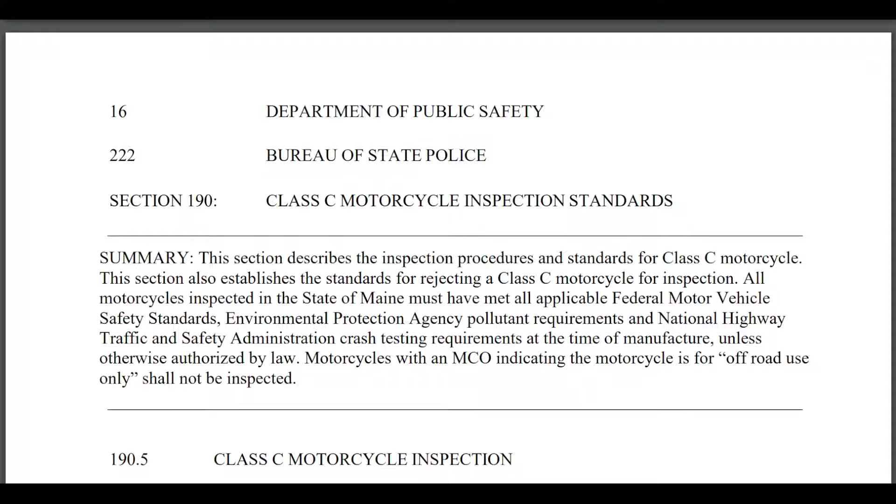Class C Motorcycle Inspection. 1. Brakes. A. General. 1. Wheels and drums are not required to be removed from the vehicle being inspected to determine the condition of the brake drums and linings, unless the inspection technician believes, based upon training and experience, that there is a problem or failure with the brakes and advises the customer that the vehicle cannot be passed for inspection without the removal of wheels and or drums to allow further assessment, so as to determine whether the vehicle may be passed for inspection.

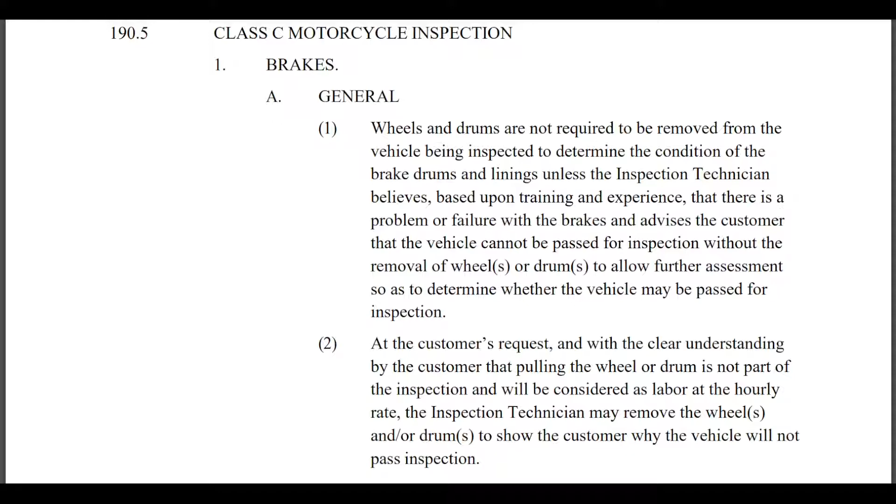2. At the customer's request, and with clear understanding by the customer that pulling the wheel or drum is not part of the inspection and will be considered as labor at the hourly rate, the inspection technician may remove the wheels and or drums to show the customer why the vehicle will not pass inspection.

3. Whenever an inspection technician feels that a road test of the motorcycle is necessary to ascertain braking efficiency or safe handling characteristics, a road test may be completed before an inspection sticker is issued.

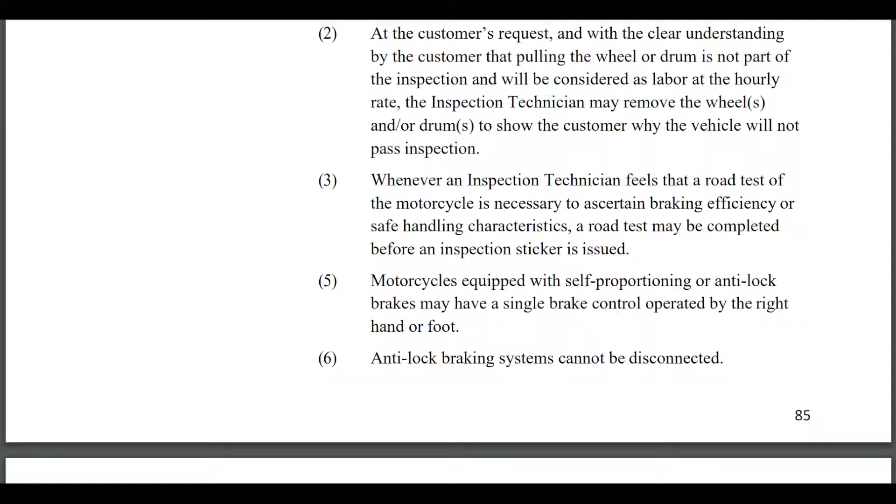5. Motorcycles equipped with a self-proportioning or anti-lock brakes may have a single brake control operated by the right hand or foot. 6. Anti-lock braking systems cannot be disconnected.

B. Brake system test procedures. 1. Brake hydraulic system test. The inspection technician must be able to maintain brake pedal or hand lever reserve under moderate pressure, 40 to 60 pounds, for 1 minute. A. Reject a vehicle if the brake reserve cannot be maintained for 1 minute.

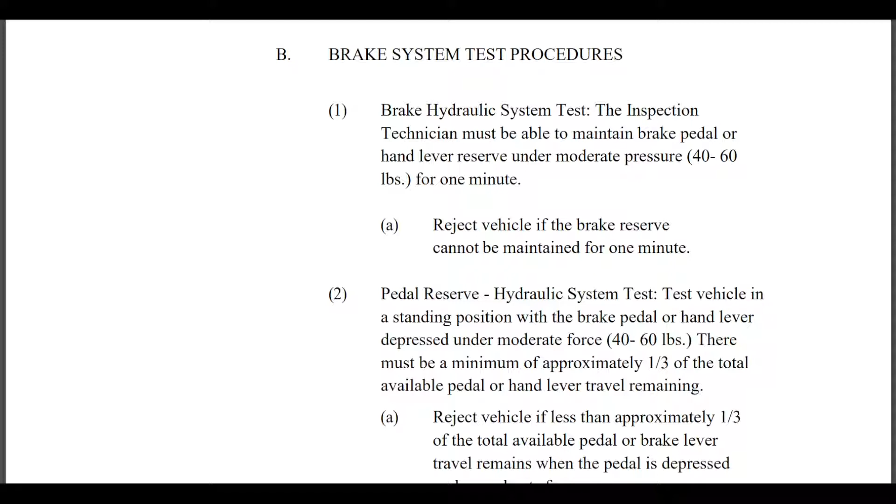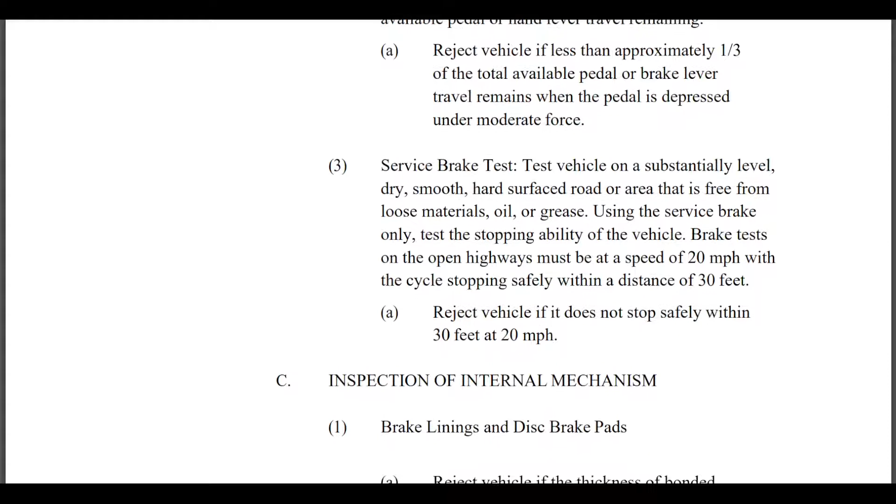2. Pedal reserve hydraulic system test. Test vehicle in a standing position with the brake pedal or hand lever depressed under moderate force, 40 to 60 pounds. There must be a minimum of approximately 1/3 of the total available pedal or hand lever travel remaining. A. Reject vehicle if less than approximately 1/3 of the total available pedal or brake lever travel remains when the pedal is depressed under moderate force.

3. Service brake test. Test vehicle on a substantially level, dry, smooth, hard surfaced road or area that is free from loose materials, oil, or grease. Using the service brake only, test the stopping ability of the vehicle. Brake tests on the open highways must be at a speed of 20 miles per hour, with the cycle stopping safely within a distance of 30 feet. A. Reject vehicle if it does not stop safely within 30 feet at 20 miles per hour.

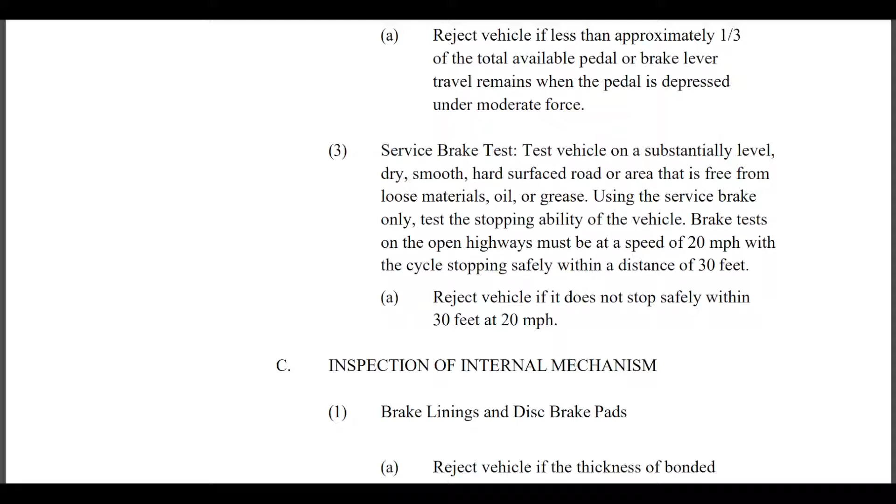C. Inspection of internal mechanism. 1. Brake linings and disc brake pads. A. Reject vehicle if the thickness of bonded brake linings, when measured at the thinnest point, is less than 2/32 of an inch. B. Reject vehicle if any wire in a wire-backed lining is visible in the friction surface. C. Reject vehicle if any riveted lining is worn to within 2/32 inch of the rivet head. D. Reject vehicle if any rivet is loose or missing, or if the lining is not securely fastened.

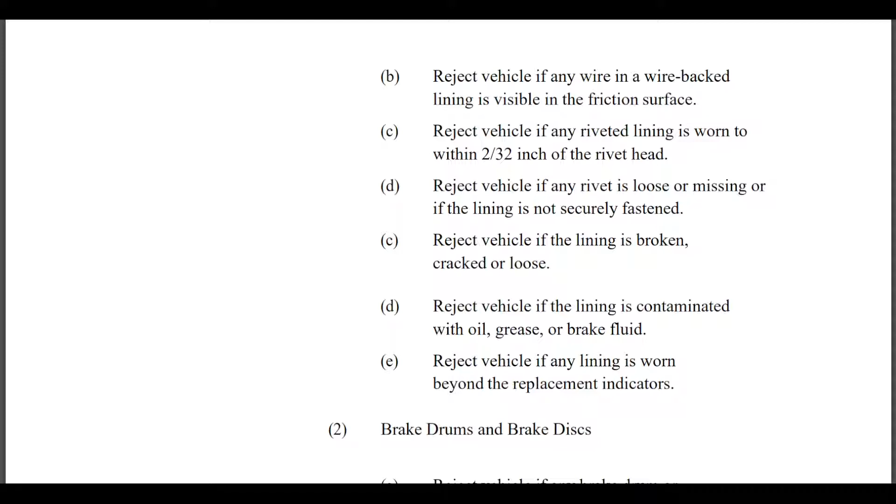C. Reject vehicle if the lining is broken, cracked, or loose. D. Reject vehicle if the lining is contaminated with oil, grease, or brake fluid. E. Reject vehicle if any lining is worn beyond the replacement indicators.

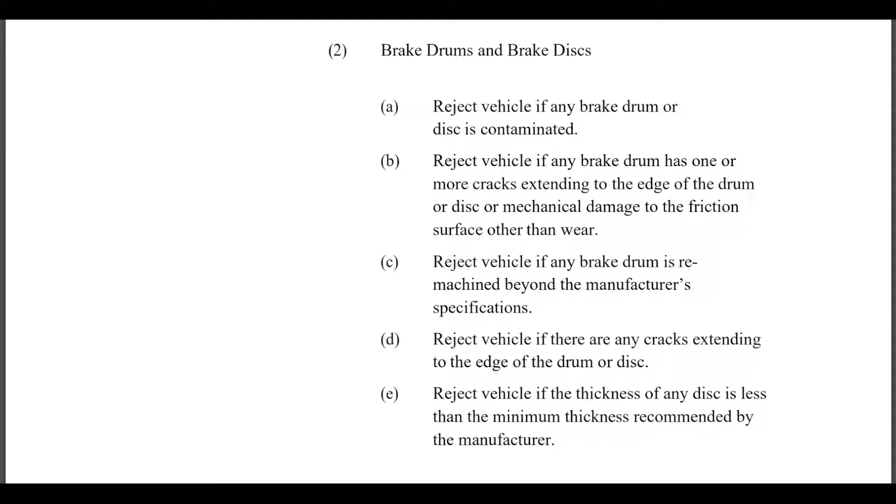2. Brake drums and brake discs. A. Reject vehicle if any brake drum or disc is contaminated. B. Reject vehicle if any brake drum has one or more cracks extending to the edge of the drum or disc, or mechanical damage to the friction surface other than wear. C. Reject vehicle if any brake drum is remachined beyond the manufacturer's specifications. D. Reject vehicle if there are any cracks extending to the edge of the drum or disc. E. Reject vehicle if the thickness of any disc is less than the minimum thickness recommended by the manufacturer.

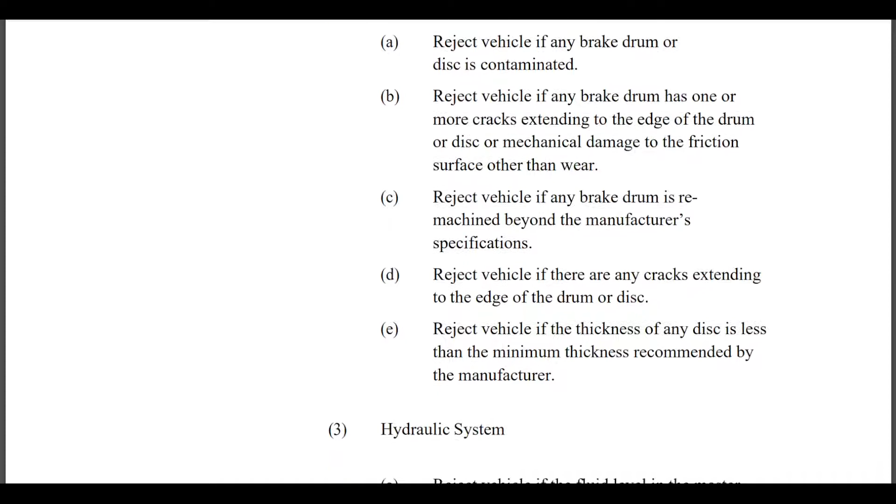3. Hydraulic system. A. Reject vehicle if the fluid level in the master cylinder reservoir is below 3/4 full.

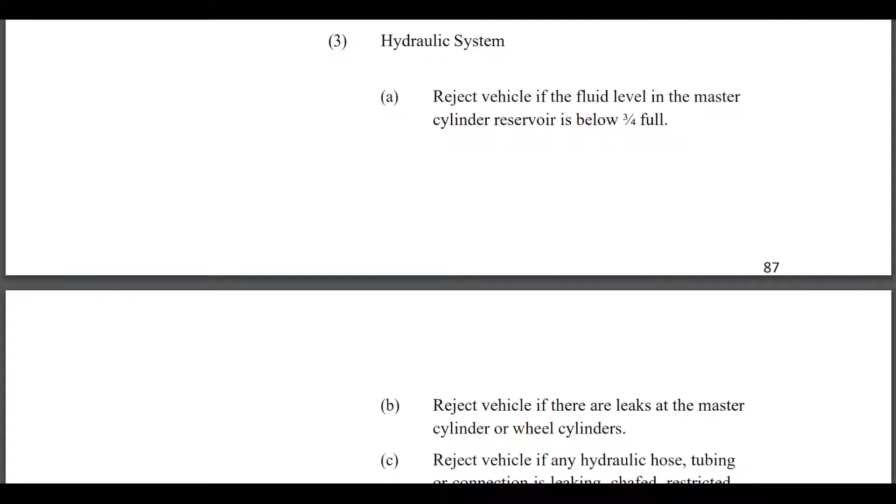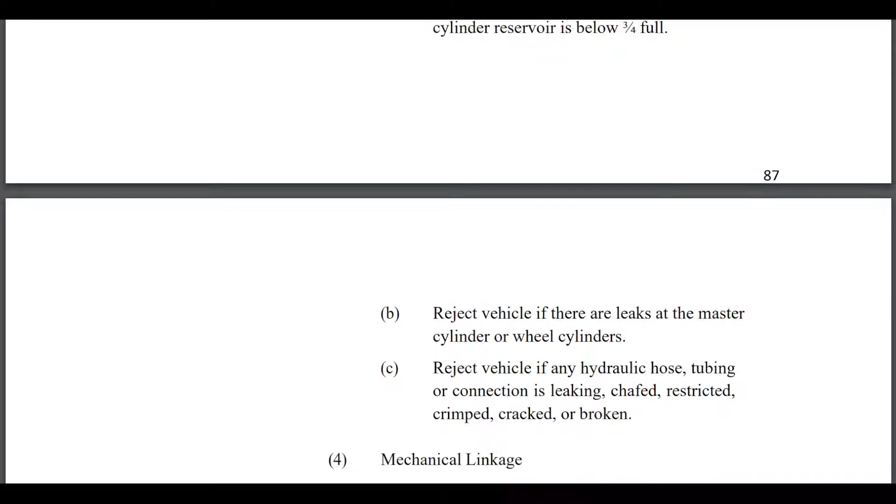Reject vehicle if there are leaks at the master cylinder or wheel cylinders. Reject vehicle if any hydraulic hose, tubing, or connection is leaking, chafed, restricted, crimped, cracked, or broken.

Mechanical linkage. Reject vehicle if any mechanical part is missing, broken, or badly worn. Reject vehicle if there is high friction in the pedal, lever, or linkage in the brake components. Reject vehicle if any brake operating lever or pedal is improperly positioned or misaligned. Reject vehicle if any brake cable has more than one strand broken, cut, or missing. Reject vehicle if any portion of the handbrake lever is broken or missing.

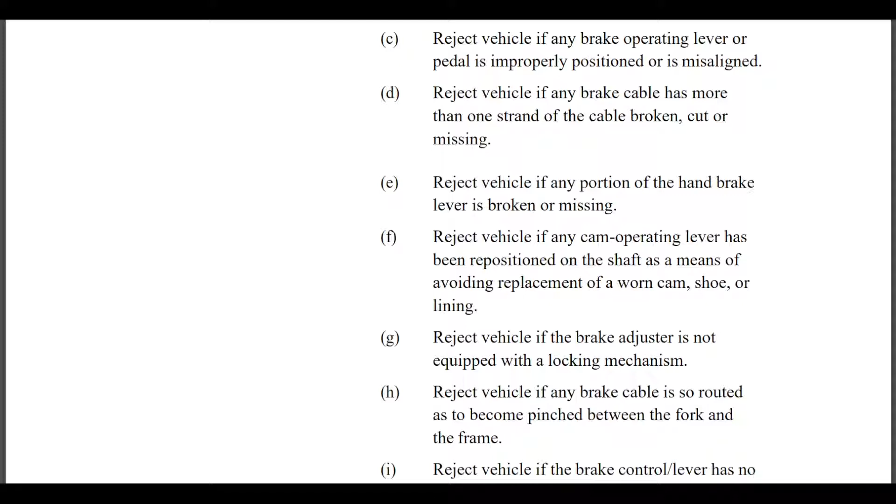Reject vehicle if any cam operating lever has been repositioned on the shaft as a means to avoid replacement of a worn cam, shoe, or lining. Reject vehicle if the brake adjuster is not equipped with a locking mechanism. Reject vehicle if any brake cable is so routed as to become pinched between the fork and the frame.

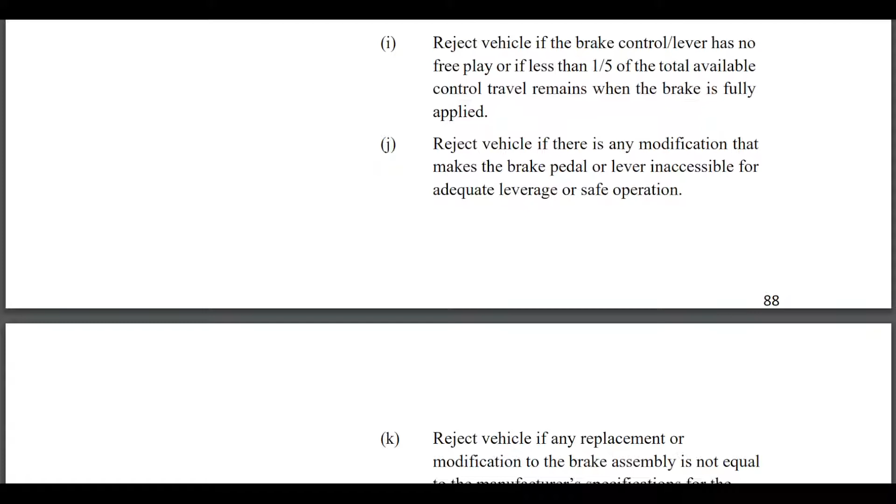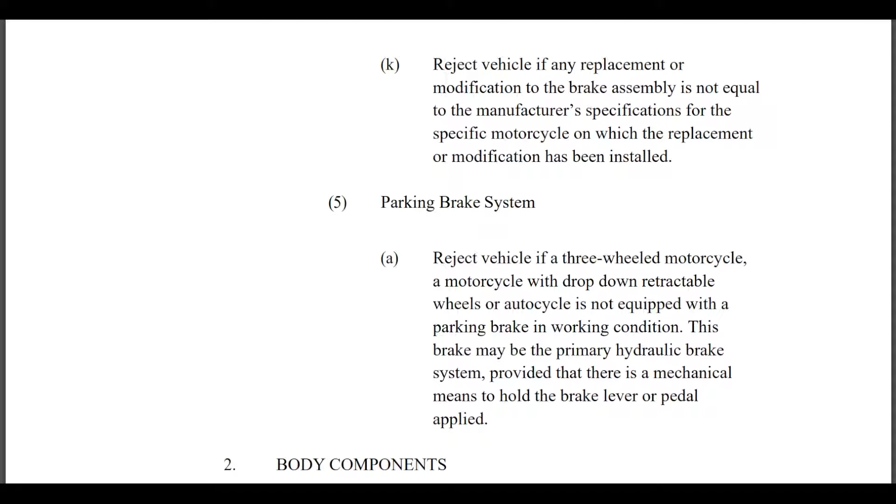Reject vehicle if the brake control lever has no free play, or if less than 1/5 of the total available control travel remains when the brake is fully applied. Reject vehicle if there is any modification that makes the brake pedal or lever inaccessible for adequate leverage or safe operation. Reject vehicle if any replacement or modification to the brake assembly is not equal to the manufacturer's specifications for the specific motorcycle on which the replacement or modification has been installed.

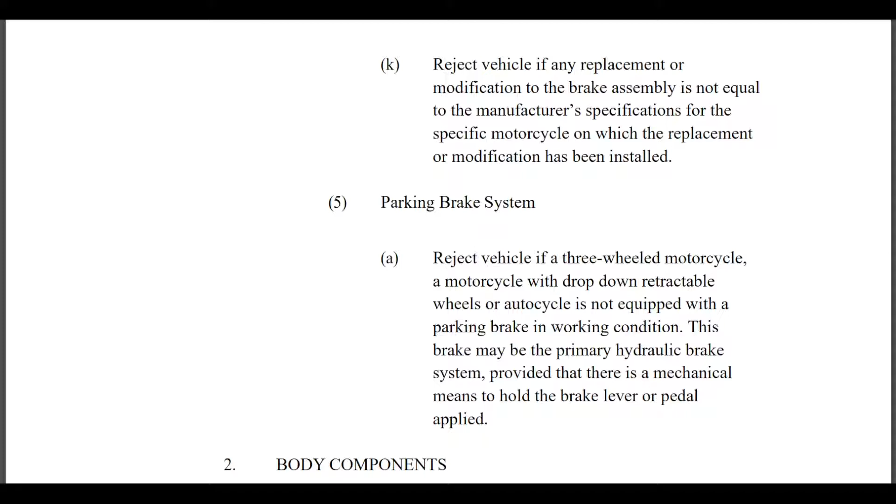Parking brake system. Reject vehicle if a 3-wheeled motorcycle, a motorcycle with drop-down retractable wheels, or an autocycle is not equipped with a parking brake in working condition. This brake may be the primary hydraulic brake system, provided that there is a mechanical means to hold the brake lever or pedal applied.

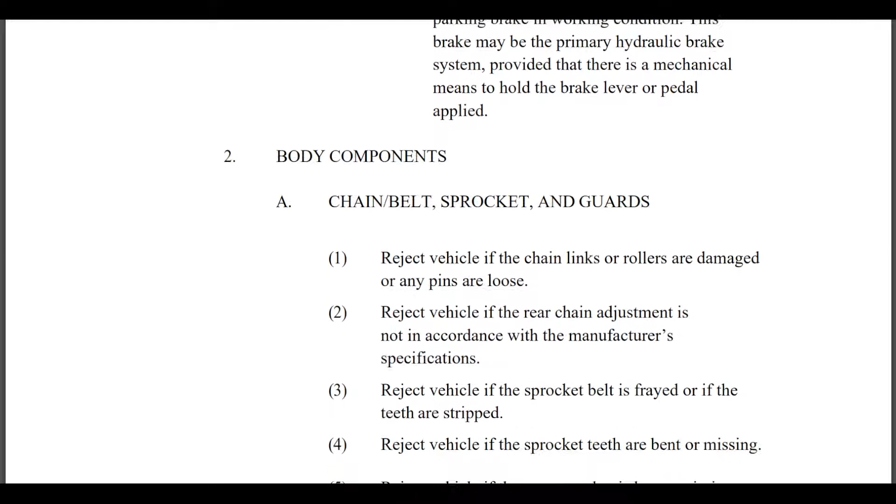Body components. Chain/belt, sprocket, and guards. Reject vehicle if the chain links or rollers are damaged or any pins are loose. Reject vehicle if the rear chain adjustment is not in accordance with the manufacturer's specifications. Reject vehicle if the sprocket belt is frayed or if the teeth are stripped. Reject vehicle if the sprocket teeth are bent or missing. Reject vehicle if the rear sprocket is loose, missing bolts, or is cracked.

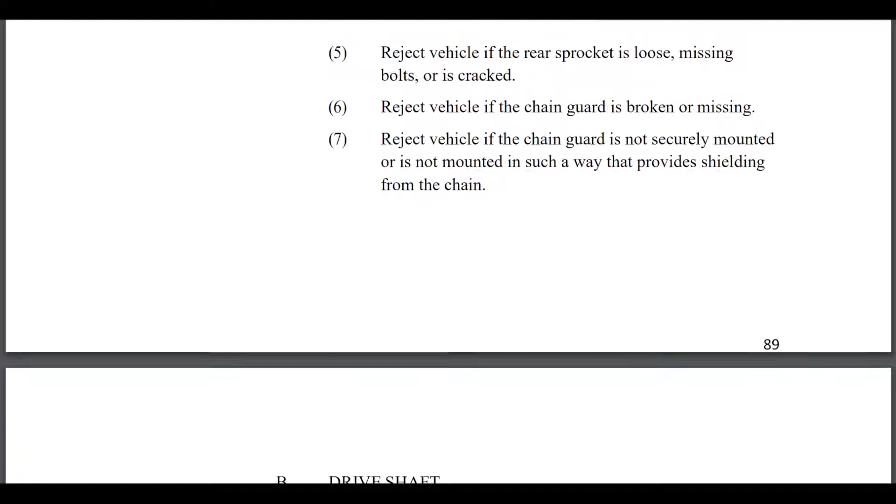Reject vehicle if the chain guard is broken or missing. Reject vehicle if the chain guard is not securely mounted or is not mounted in such a way that provides shielding from the chain. Drive shaft. Reject vehicle if the drive shaft is leaking fluid.

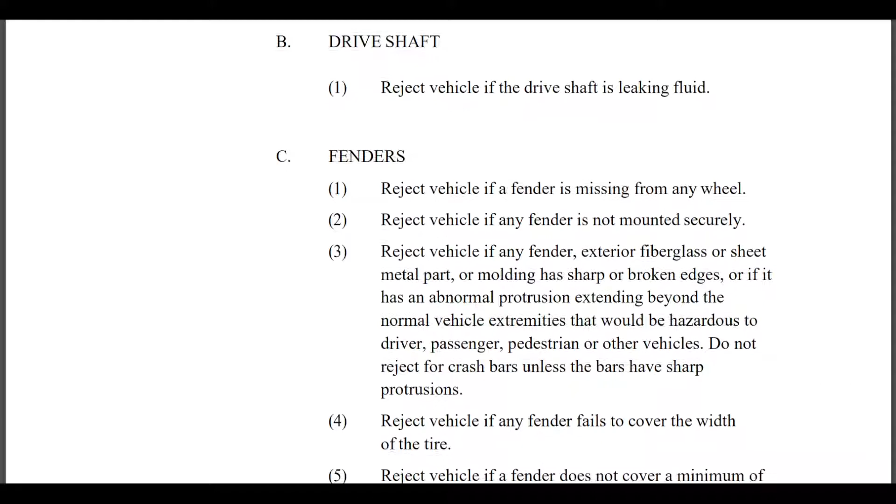Fenders. Reject vehicle if a fender is missing from any wheel. Reject vehicle if any fender is not mounted securely. Reject vehicle if any fender, exterior fiberglass or sheet metal part, or molding has sharp or broken edges, or if it has an abnormal protrusion extending beyond the normal vehicle extremities that would be hazardous to driver, passenger, pedestrians, or other vehicles. Do not reject for crash bars unless the bars have sharp protrusions.

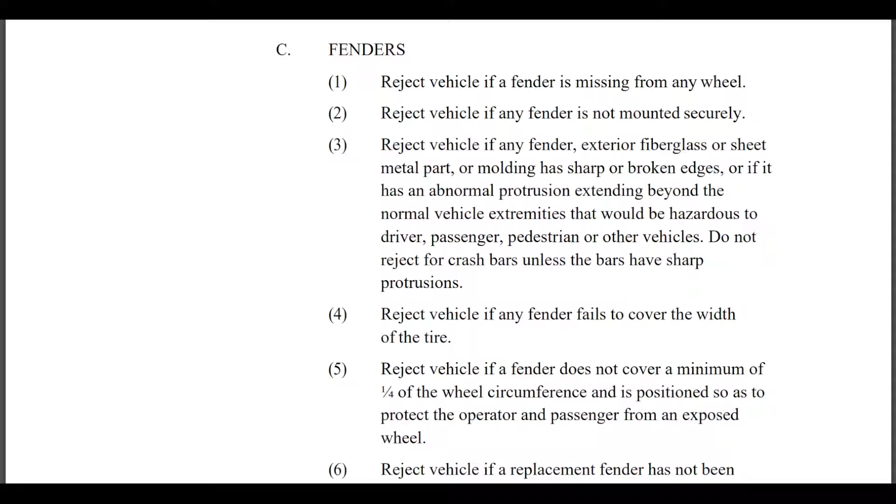Reject vehicle if any fender fails to cover the width of the tire. Reject vehicle if a fender does not cover a minimum of 1/4 of the wheel circumference and is positioned so as to protect the operator and passenger from an exposed wheel. Reject vehicle if a replacement fender has not been refitted with a required lighting device.

Stands. Reject vehicle if the center or side stands do not operate properly. Reject vehicle if the motorcycle does not remain on the stand when the front wheel is turned from stop to stop. Reject vehicle if either stand is cracked or broken. Reject vehicle if the stand will not retract or remain in a fully retracted or stored position.

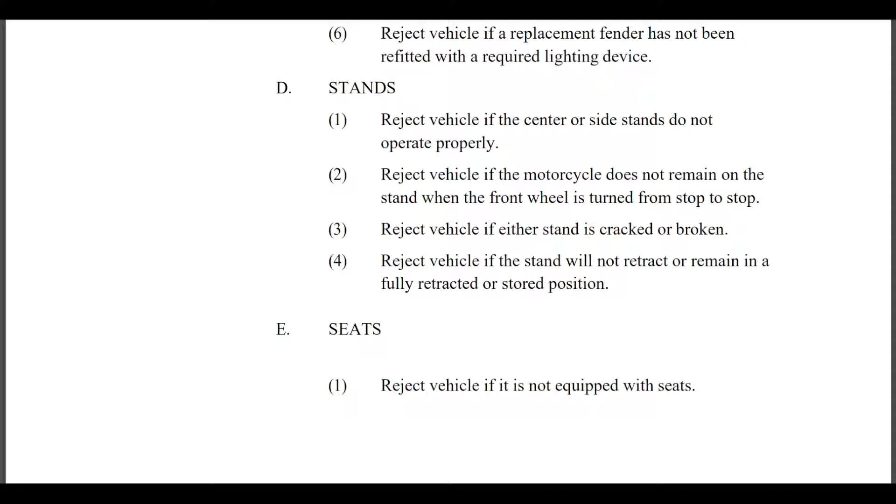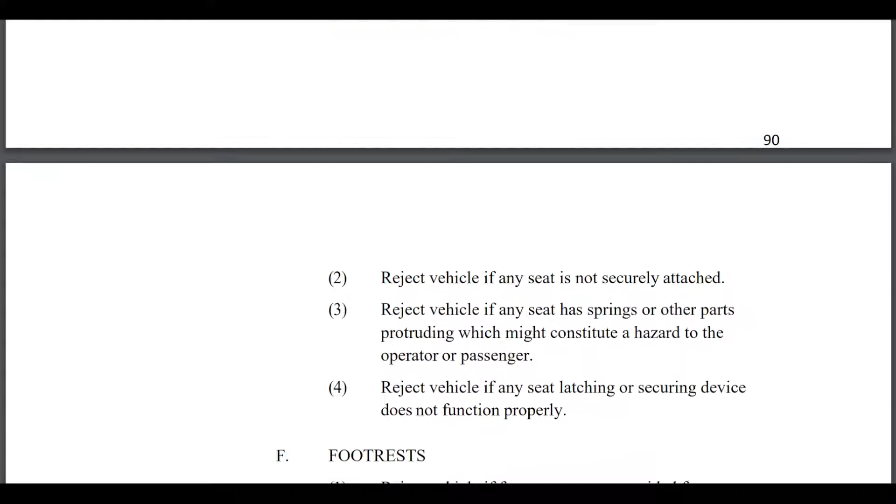Seats. Reject vehicle if it is not equipped with seats. Reject vehicle if any seat is not securely attached. Reject vehicle if any seat has springs or other parts protruding which might constitute a hazard to the operator or passenger. Reject vehicle if any seat latching or securing device does not function properly.

Footrests. Reject vehicle if footrests are not provided for each designated seating position. Reject vehicle if the footrests are not in an accessible position for a passenger's feet. Reject vehicle if any footrest is not securely attached. Reject vehicle if any footrest does not fold upward or rearward when not in use.

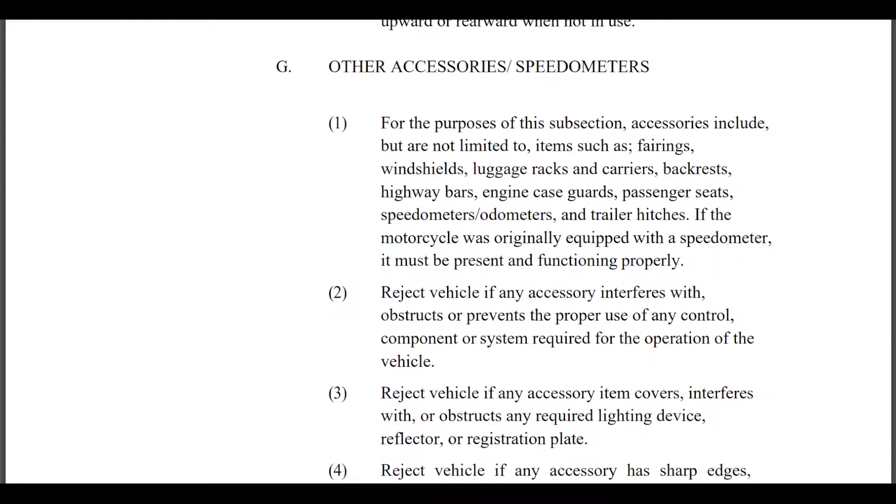Accessories and speedometers. For the purposes of this subsection, accessories include, but are not limited to, items such as fairings, windshields, luggage racks and carriers, backrests, highway bars, engine case guards, passenger seats, speedometers or odometers, and trailer hitches. If the motorcycle was originally equipped with a speedometer, it must be present and functioning properly.

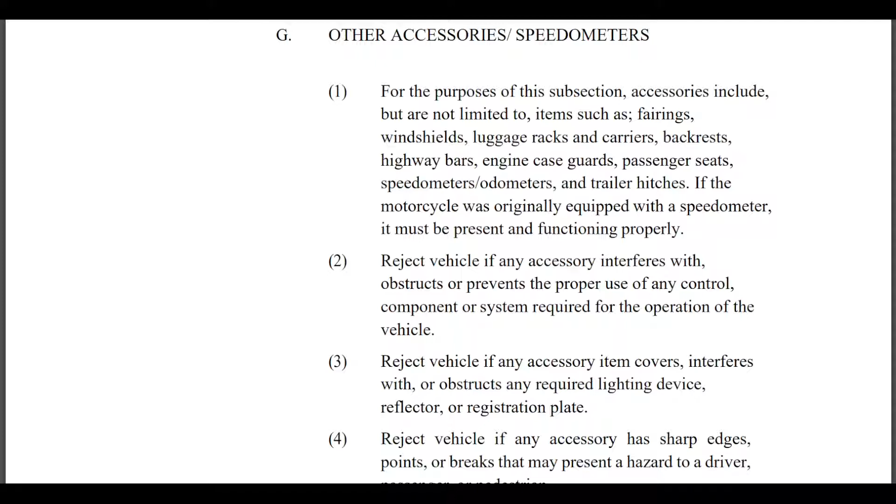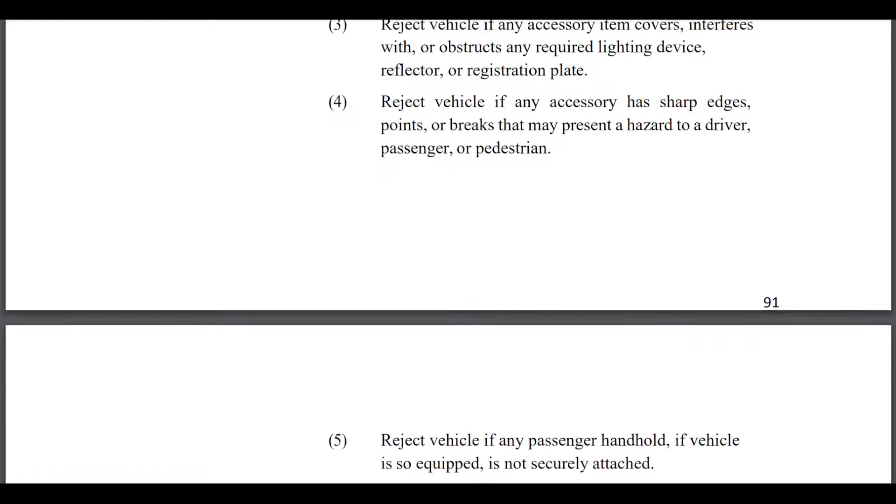Reject vehicle if any accessory interferes with, obstructs, or prevents the proper use of any control, component, or system required for the operation of the vehicle. Reject vehicle if any accessory item covers, interferes with, or obstructs any required lighting device, reflector, or registration plate. Reject vehicle if any accessory has sharp edges, points, or breaks that might present a hazard to a driver, passenger, or pedestrian.

Reject vehicle if any passenger handhold, if vehicle so equipped, is not securely attached. Reject vehicle if an installed windscreen is cracked, discolored, or scratched so as to obstruct the driver's forward vision. Reject vehicle if the glazing in an installed windscreen is not of an approved type. Reject vehicle if an installed windscreen obstructs or obscures the driver's view of the road surface directly ahead of the front wheel. Reject vehicle if any attaching bracket, clamp, bolt, brace, or other similar fastening device anywhere on the motorcycle is loose, broken, or in other than a safe condition.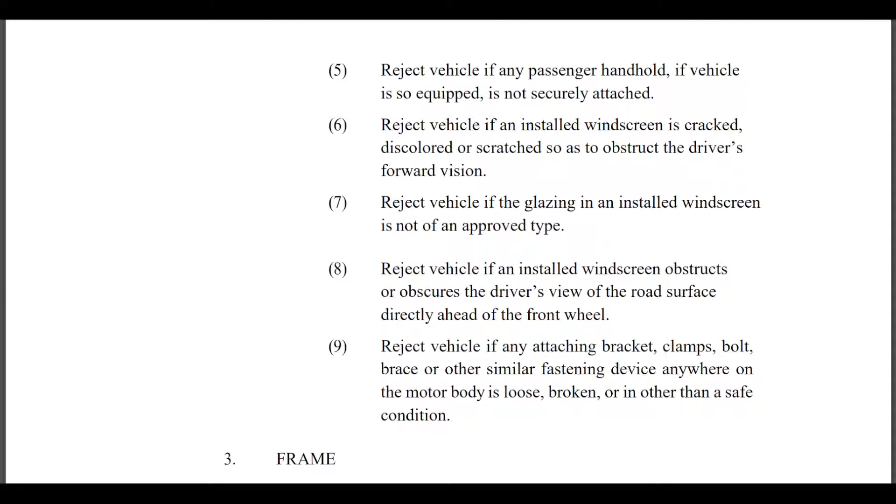Frame. Reject vehicle if any part of the frame has been removed so as to weaken the original structure. Reject vehicle if the frame is cracked, broken, or twisted, or if there's evidence of structural damage. Reject vehicle if any weld or joint shows cracks or fatigue breaks. Reject vehicle if the frame is out of alignment.

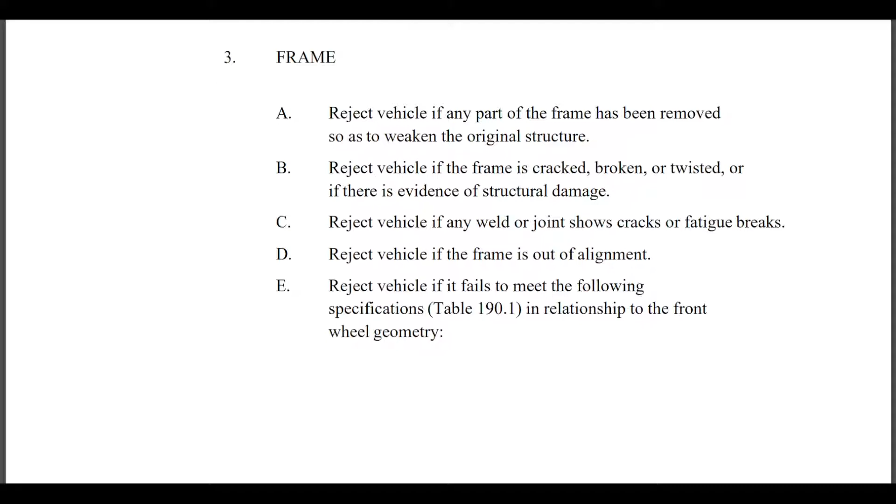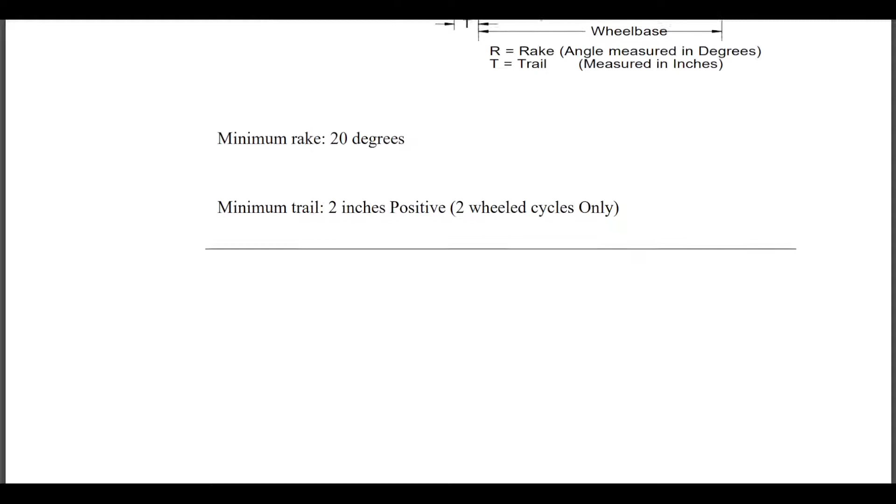Steering and suspension. Front fork. Reject vehicle if any fork component is loose or shows any perceptible wear. Reject vehicle if fork slugs have been installed. Reject vehicle if the length of the original fork has been extended by replacing the original tubes with tubes longer than 16 inches, or if the vehicle exceeds the rake and trail limits. Reject vehicle if Springer-type front forks exceed the original design by 18 inches or more.

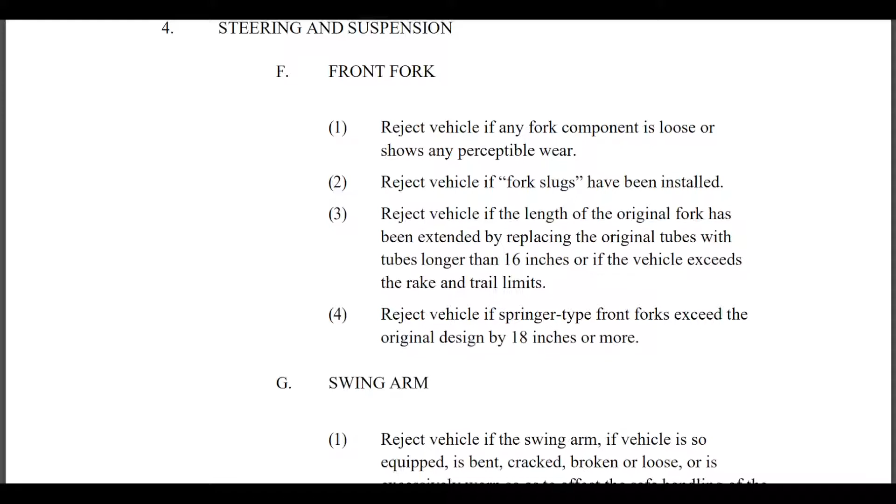Swing arm. Reject vehicle if the swing arm, if the vehicle is so equipped, is bent, cracked, broken, or loose, or is excessively worn so as to affect the safe handling of the vehicle.

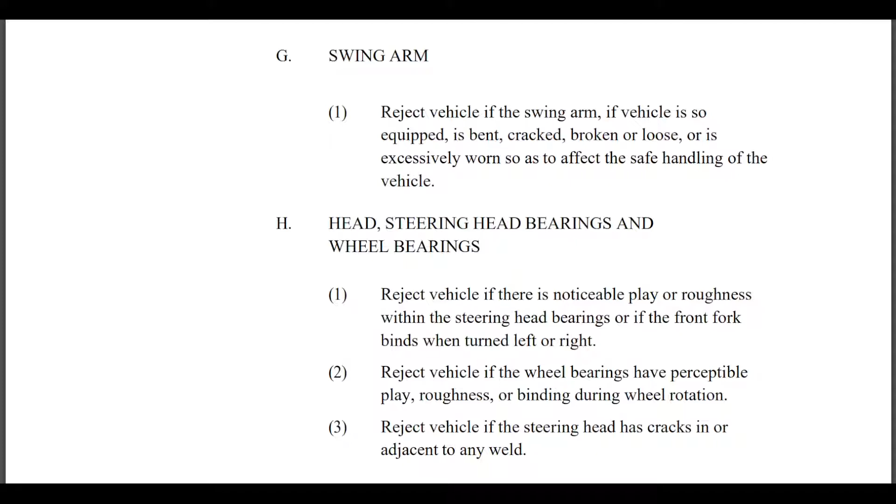Head, steering head bearings, and wheel bearings. Reject vehicle if there is noticeable play or roughness within the steering head bearings, or if the front fork binds when turned left or right. Reject vehicle if the wheel bearings have perceptible play, roughness, or binding during wheel rotation. Reject vehicle if the steering head has cracks in it or adjacent to any weld.

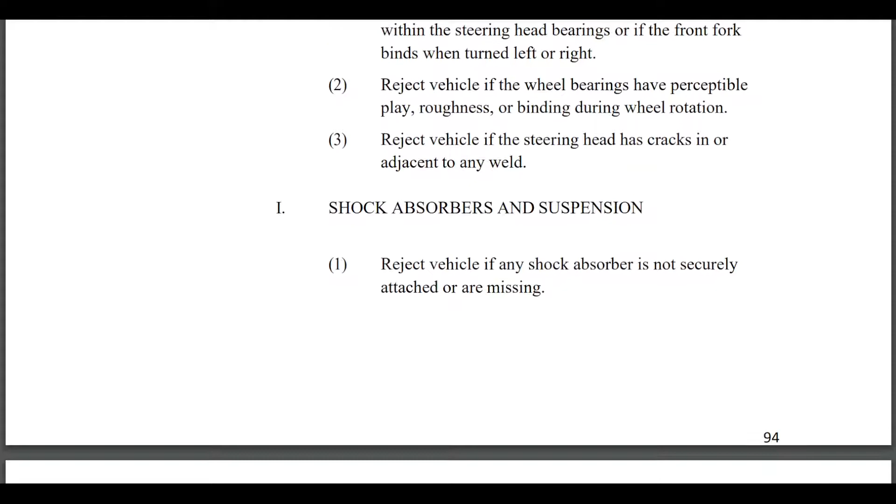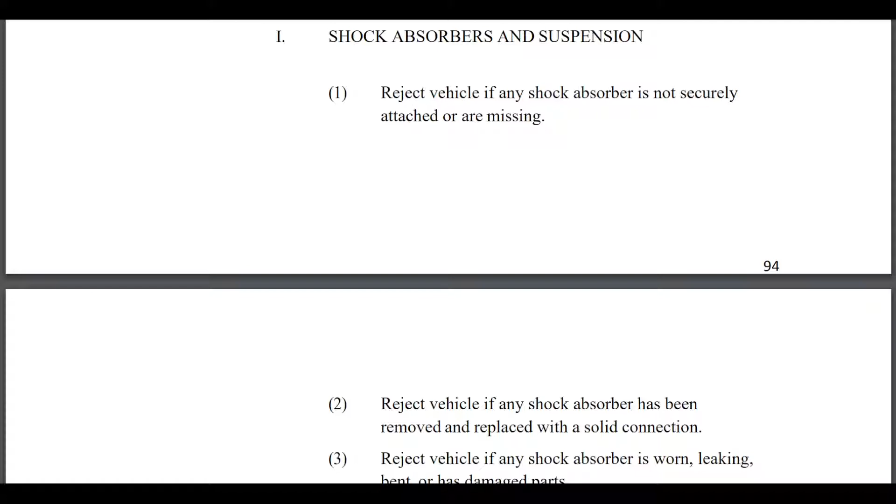Shock absorbers and suspension. Reject vehicle if any shock absorber is not securely attached or is missing. Reject vehicle if any shock absorber has been removed and replaced with a solid connection. Reject vehicle if any shock absorber is worn, leaking, bent, or has damaged parts. Reject vehicle if any suspension spring is broken, worn, or loose.

Reject vehicle if a hard tail frame is not of a type manufactured completely as a hard tail. A bolt-on or weld-on type is not acceptable. This criterion does not apply to three-wheeled vehicles.

Handlebars. Reject vehicle if the handlebars are cracked, broken, or misaligned. Reject vehicle if the handlebars are positioned so that the hand grips are at a level above the operator's shoulder height when the operator is sitting astride the seat, or if the hand grips are positioned such that the vertical rise is more than 15 inches above the surface of the operator's seat. If the handlebars were originally manufactured at a height greater than 15 inches from the seat, you may pass the vehicle as long as the conditions above are met and the height is not greater than the original handlebars. A motorcycle must meet the lesser of these two values.

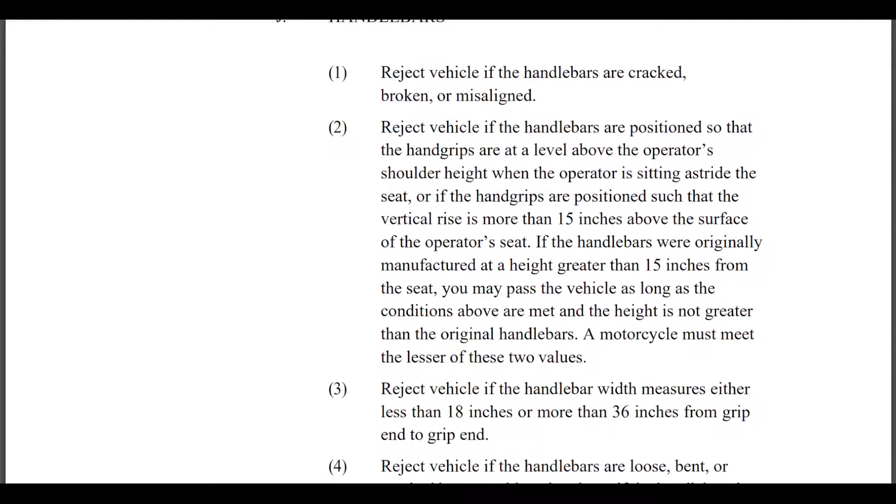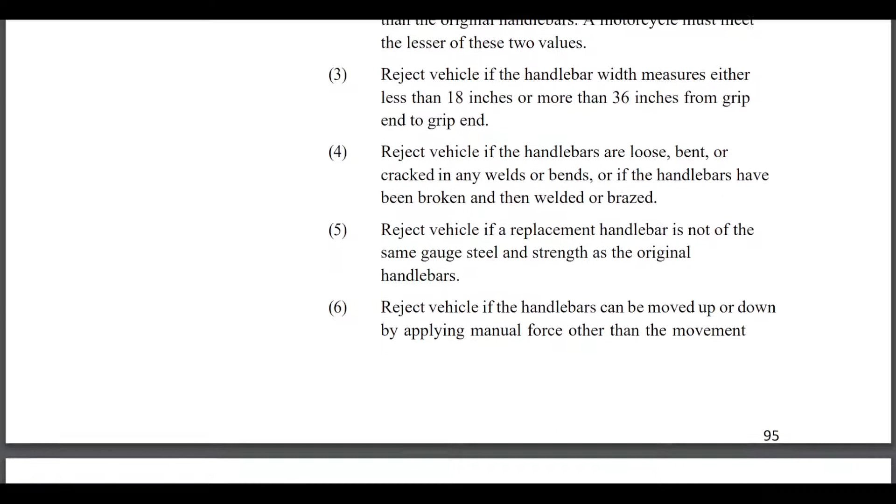Reject vehicle if the handlebar width measures less than 18 inches or more than 36 inches from grip end to grip end. Reject vehicle if the handlebars are loose, bent, or cracked in any welds or bends, or if the handlebars have been broken and then welded or brazed. Reject vehicle if a replacement handlebar is not of the same gauge steel and strength as the original handlebars.

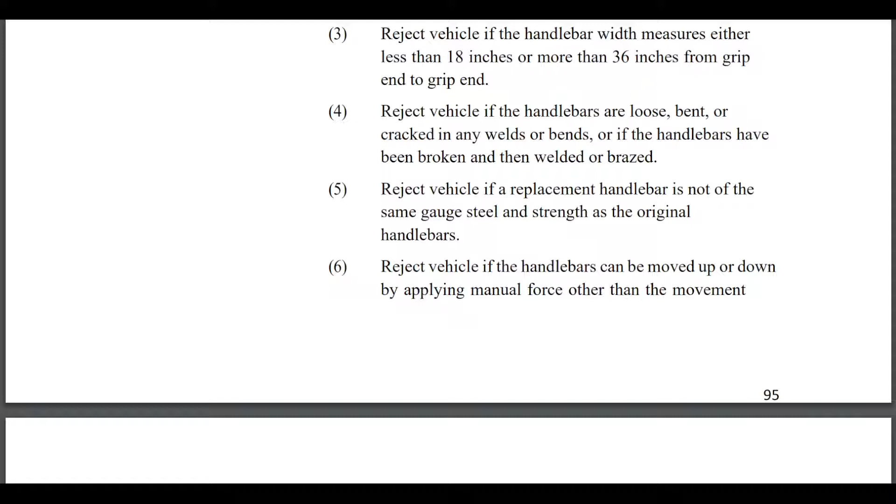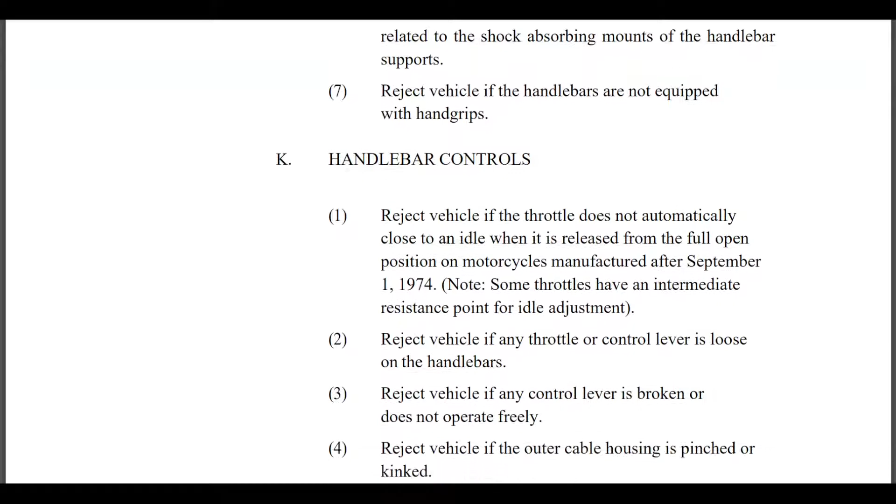Reject vehicle if the handlebars can be moved up and down by applying manual force, other than the movement related to the shock-absorbing mounts of the handlebar supports. Reject vehicle if the handlebars are not equipped with hand grips.

Handlebar controls. Reject vehicle if the throttle does not automatically close to an idle when it is released from the full open position on motorcycles manufactured after September 1st, 1974. Note: some throttles have an intermediate resistance point for idle adjustment.

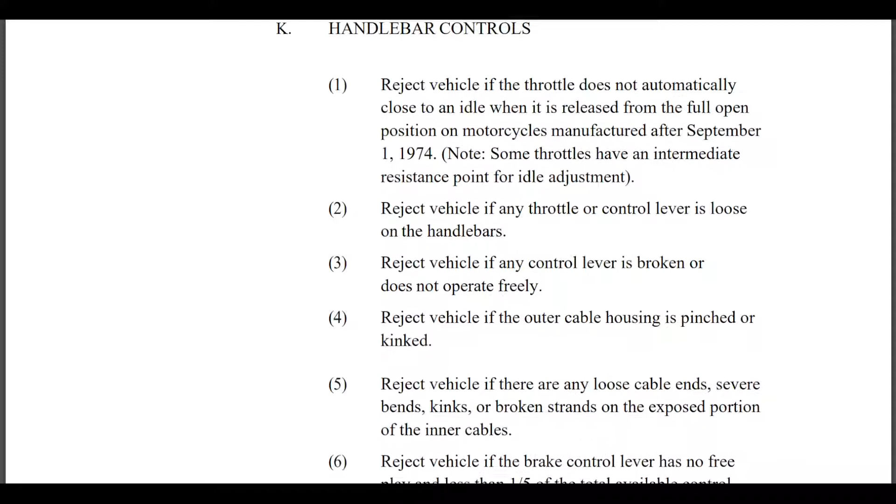Reject vehicle if any throttle or control lever is loose on the handlebars. Reject vehicle if any control lever is broken or does not operate freely. Reject vehicle if the outer cable housing is pinched or kinked. Reject vehicle if there are any loose cable ends, severe bends, kinks, or broken strands on the exposed portion of the inner cables.

Reject vehicle if it is not equipped with an operable engine stop control. Reject vehicle if any cable is excessively slack.

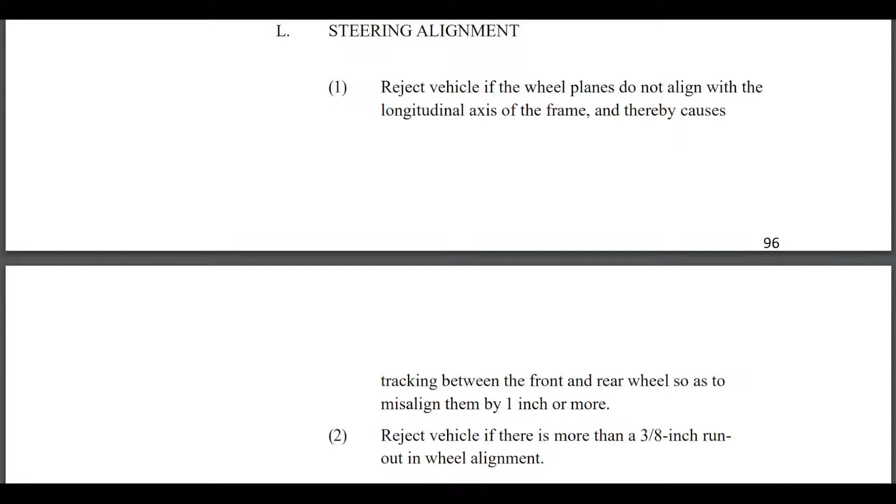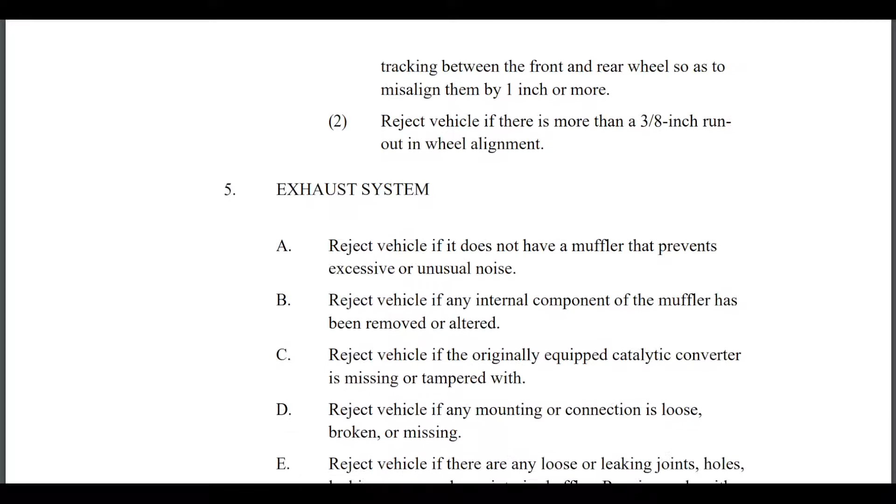Steering alignment. Reject vehicle if the wheel planes do not align with the longitudinal axis of the frame, thereby causing a tracking between the front and rear wheel so as to misalign them by 1 inch or more. Reject vehicle if there is more than 3/8 inch runout in wheel alignment.

Exhaust system. Reject vehicle if it does not have a muffler that prevents excessive or unusual noise. Reject vehicle if any internal component of the muffler has been removed or altered. Reject vehicle if the originally equipped catalytic converter is missing or tampered with.

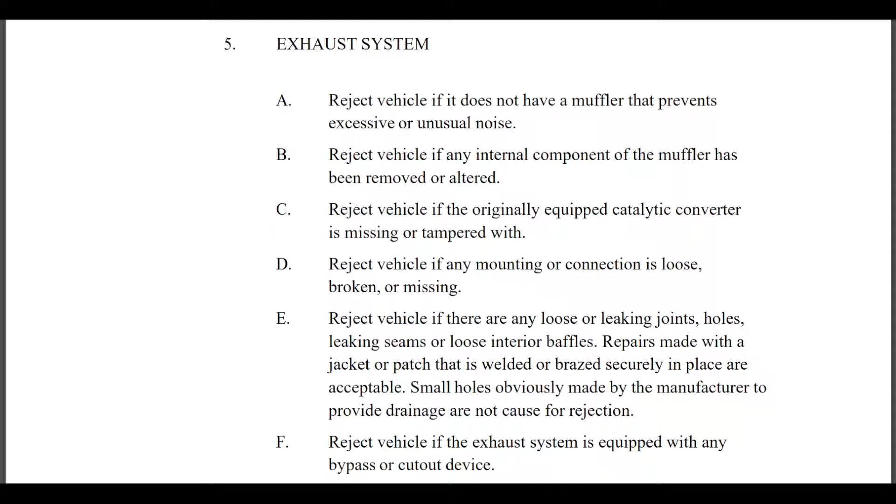Reject the vehicle if any mounting or connection is loose, broken, or missing. Reject vehicle if there are any loose or leaking joints, holes, leaking seams, or interior loose baffles. Repairs may be made with a jacket or patch that is welded or brazed securely in place are acceptable. Small holes obviously made by the manufacturer to provide drainage are not a cause for rejection.

Reject vehicle if the exhaust system is equipped with any bypass or cutout device. Reject vehicle if any flexible tubing has been used to replace any part of the exhaust system, unless such tubing was factory installed as original equipment.

Reject vehicle if the muffler shield has been removed. Reject vehicle if any unshielded portion of the exhaust system protrudes in a manner that might burn the rider or a passenger seated in a normal riding position.

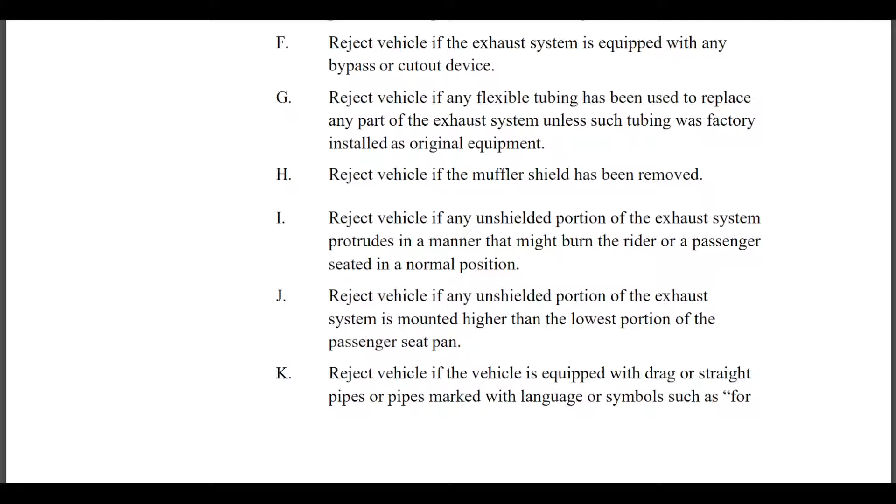Reject vehicle if any unshielded portion of the exhaust system is mounted higher than the lowest portion of the passenger seat pan. Reject vehicle if the vehicle is equipped with drag or straight pipes, or pipes marked with language or symbols such as 'for race off-road use only,' indicating that the pipe or pipes are not intended for use on a public way.

Reject vehicle if baffles are inserted into the exhaust pipe in place of a muffler. Baffles do not constitute a muffler. The muffler and the exhaust pipe may be welded together.

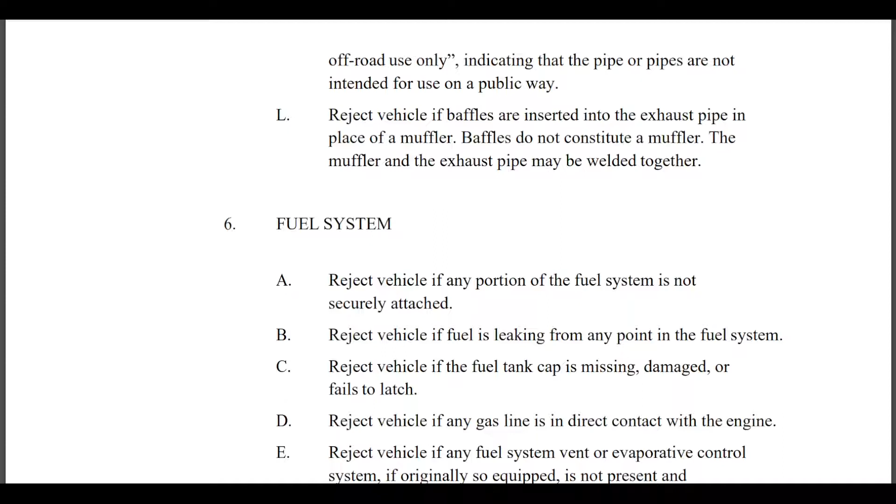Fuel system. Reject vehicle if any portion of the fuel system is not securely attached. Reject vehicle if fuel is leaking from any point in the fuel system. Reject vehicle if the fuel tank cap is missing, damaged, or fails to latch. Reject vehicle if any gas line is in direct contact with the engine.

Reject vehicle if any fuel system vent or evaporative control system, if so originally equipped, is not present and operational. Lighting and electrical systems.

Reject vehicle if any lamp, bulb, lens, or reflective device is broken, severely discolored, inoperable, or shows a color contrary to law or regulation. Any replacement lamp must be DOT approved for highway use.

Reject vehicle if any lens, bulb, or filament is missing or fails to light as designed. Reject vehicle if an improperly connected circuit does not light the proper filaments for the different switch positions. Reject vehicle if any lens is missing or is rotated upside down, wrong side out, or otherwise improperly installed.

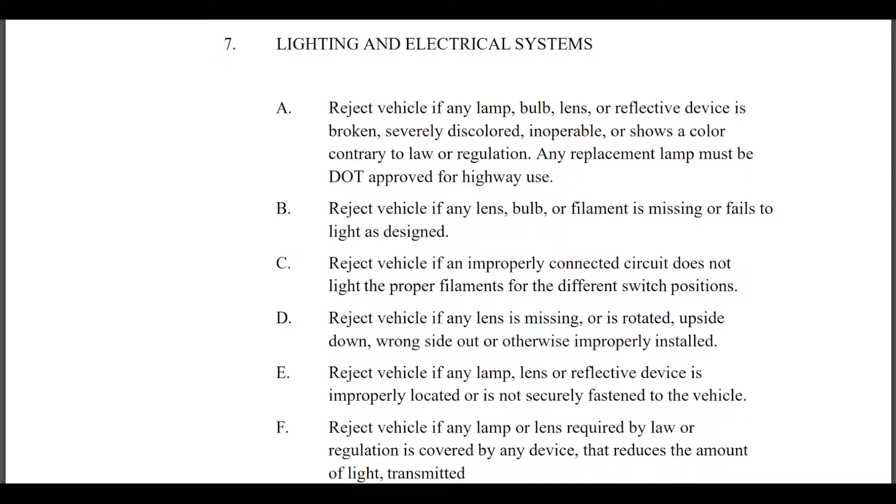Reject vehicle if any lamp or lens required by law or regulation is covered by any device that reduces the amount of light transmitted, or reduces the area of illumination of a lamp or lens by any amount. This includes, but is not limited to, tinted, louvered, or mesh covers.

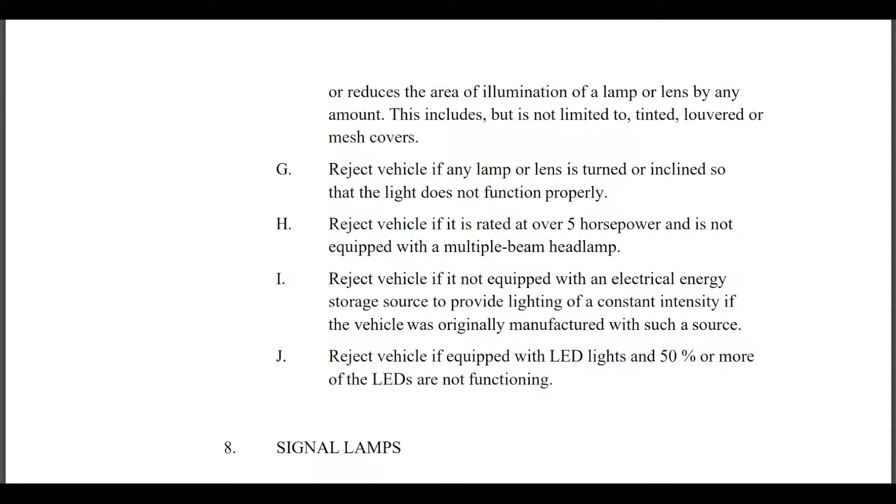Reject vehicle if any lamp or lens is turned or inclined so that the light does not function properly. Reject vehicle if it is rated at over 5 horsepower and is not equipped with a multiple beam headlamp. Reject vehicle if it is not equipped with an electrical energy storage source of providing lighting of a constant intensity if the vehicle was originally manufactured with such a source. Reject vehicle if equipped with LED lights and 50% or more of the LEDs are not functioning.

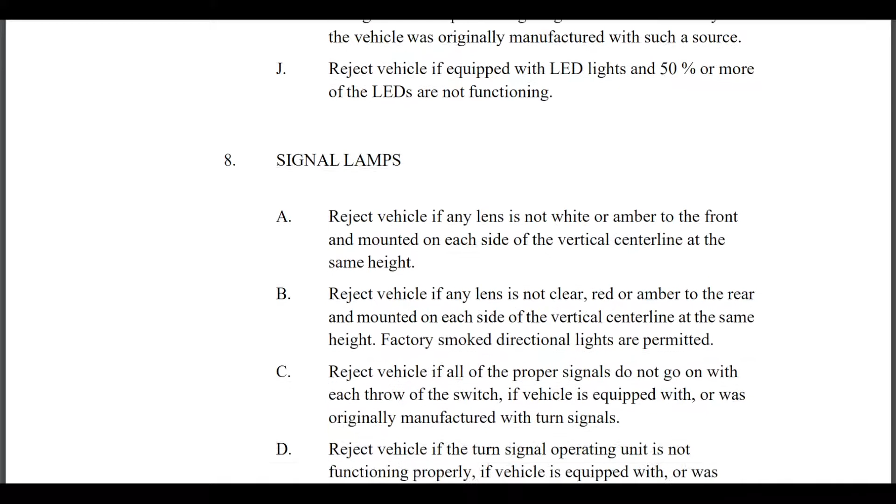Signal lamps. Reject vehicle if any lens is not white or amber to the front and mounted on each side of the vertical centerline at the same height. Reject vehicle if any lens is not clear, red, or amber to the rear and mounted on each side of the vertical centerline at the same height. Factory smoked directional lights are permitted.

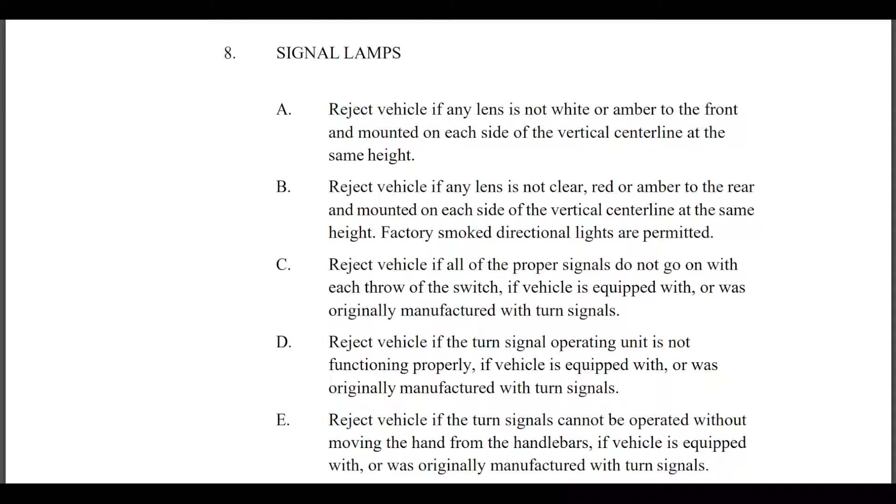Reject vehicle if all of the proper signals do not go on with each throw of the switch, if vehicle is equipped with or was originally manufactured with turn signals. Reject vehicle if the turn signal operating unit is not functioning properly, if vehicle is equipped with or was originally manufactured with turn signals. Reject vehicle if the turn signals cannot be operated without moving the hand from the handlebars, if vehicle is equipped with or was originally manufactured with turn signals.

Stop lamps. Reject vehicle if the stop lamp does not go on with slight pressure on the brake pedal or front brake lever. Reject vehicle if the stop lamp lens is not clear or red. The lights must be red.

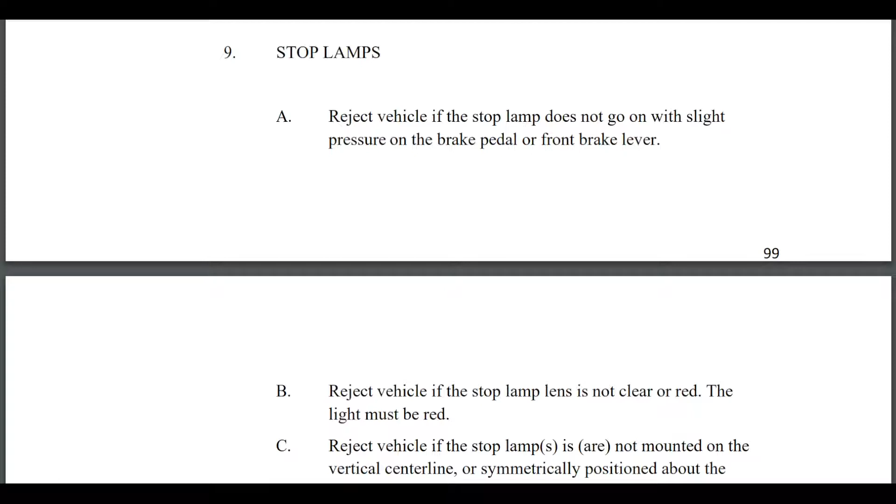Reject vehicle if the stop lamps is or are not mounted on the vertical centerline or symmetrically positioned about the vertical centerline if 2 lamps are used. Reject vehicle if the stop lamps are mounted less than 15 inches or more than 72 inches above the road surface.

Rear lamps, license plate lamps, and rear lamp combinations. Reject vehicle if the taillight does not produce sufficient light to be clearly visible from a distance of 100 feet to the rear. Reject vehicle if the taillight lens is not clear or red. The light, however, must be red.

Reject vehicle if any tail lamp is not mounted securely in the center or to the left of the axis. Reject vehicle if any tail lamp does not produce a steady or pulsating light to the rear with the brakes applied. Reject vehicle if any license plate light bulb does not produce a sufficient steady white light to illuminate the entire rear license plate to be clearly visible from a distance of 50 feet to the rear.

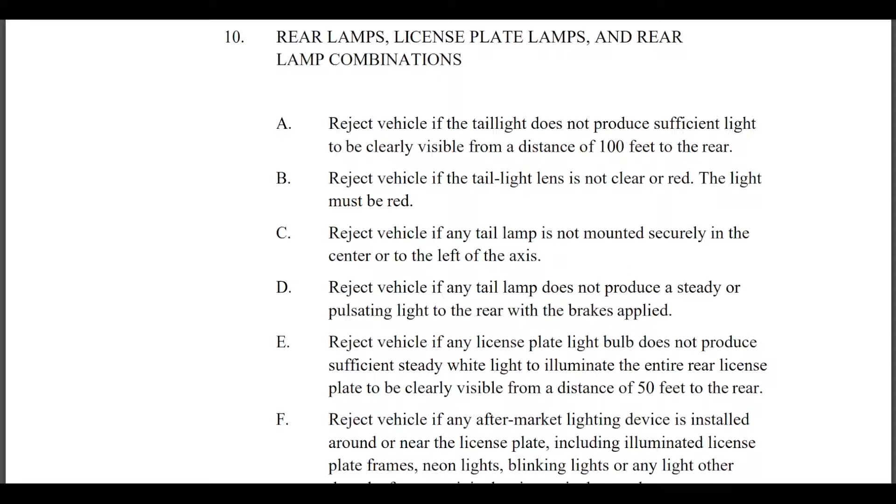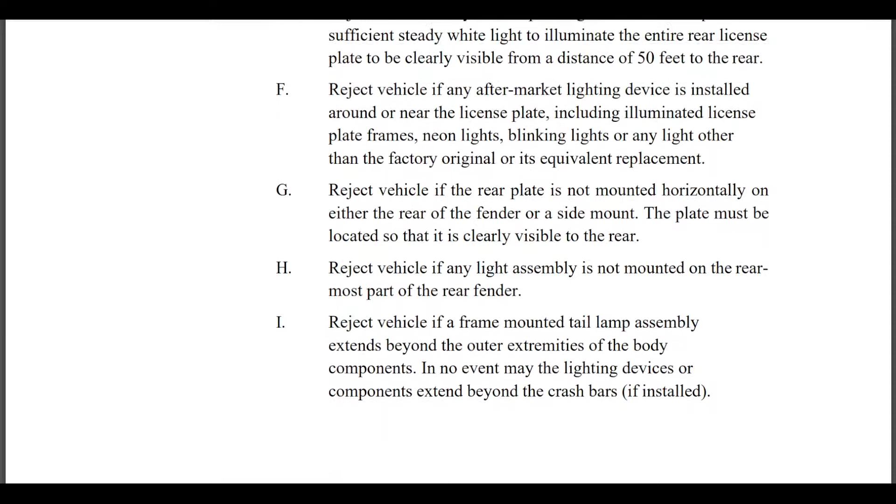Reject vehicle if any aftermarket lighting device is installed around or near the license plate, including illuminated license plate frames, neon lights, blinking lights, or any other than the factory original or its equivalent replacement.

Reject vehicle if the rear plate is not mounted horizontally on either the rear of the fender or a side mount. The plate must be located so that it is clearly visible to the rear. Reject vehicle if any light assembly is not mounted on the rearmost part of the rear fender. Reject vehicle if the frame-mounted tail lamp assembly extends beyond the outer extremities of the body components.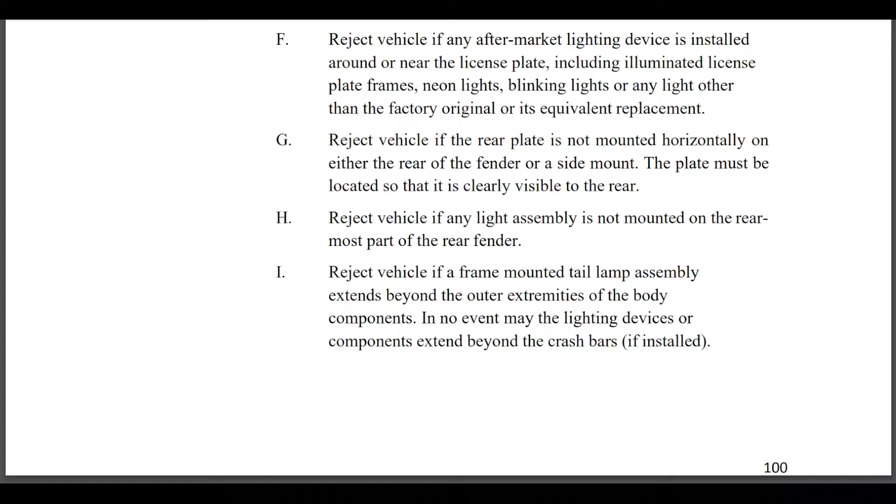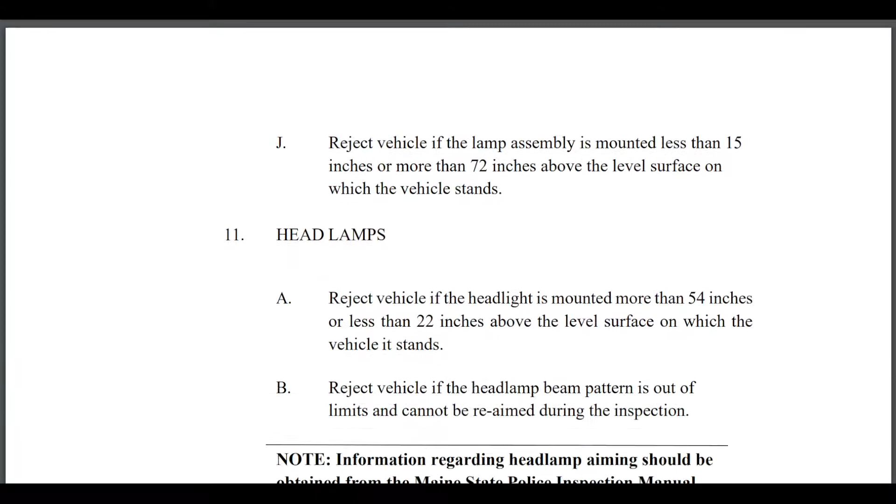In no event may the lighting devices or components extend beyond the crash bars if installed. Reject vehicle if the lamp assembly is mounted less than 15 inches or more than 72 inches above the level surface on which the vehicle stands.

Headlamps. Reject vehicle if the headlight is mounted more than 54 inches or less than 22 inches above the level surface on which the vehicle stands. Reject vehicle if the headlamp beam pattern is out of limits and cannot be re-aimed during the inspection. Note: information regarding headlamp aiming should be obtained from the Maine State Police Inspection Manual supplemental information or within additional resource materials.

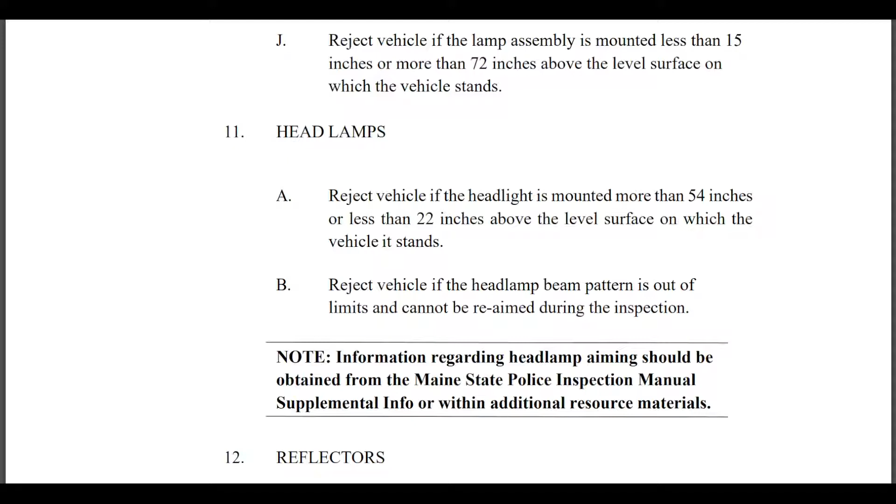Reflectors. Reject vehicle if the vehicle is not equipped with at least one adequate reflector securely attached to the rear of the vehicle. The reflector may be part of the rear lamp assembly. Reject vehicle if the rear reflectors are not red or are not mounted on the vertical center line. If two reflectors are used, reject vehicle if both are not mounted about the vertical center line.

Reject vehicle if the reflectors are not adequate to reflect the high-beamed headlight of a vehicle approaching from the rear and being driven at night on an unlit highway from a minimum distance of 200 feet.

Reject vehicle if there is not a red reflector mounted on each side of the vehicle as far as practical to the rear, and an amber reflector mounted on each side of the vehicle as far as practical to the front. This section does not apply to motorcycles manufactured before January 1st, 1968.

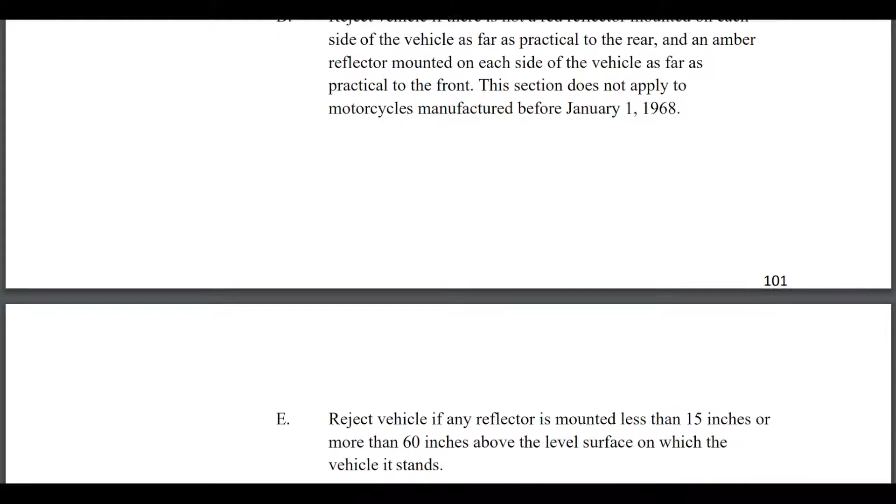Reject vehicle if any reflector is mounted less than 15 inches or more than 60 inches above the level surface on which the vehicle stands.

13. Horn. A. Reject vehicle if it is not equipped with a horn. B. Reject vehicle if the horn is not securely mounted or is not audible.

C. Reject vehicle if the horn actuating device does not function properly or is not accessible to the operator without moving the operator's hand from the handlebar. This section does not apply to a three-wheeled cycle equipped with a steering wheel.

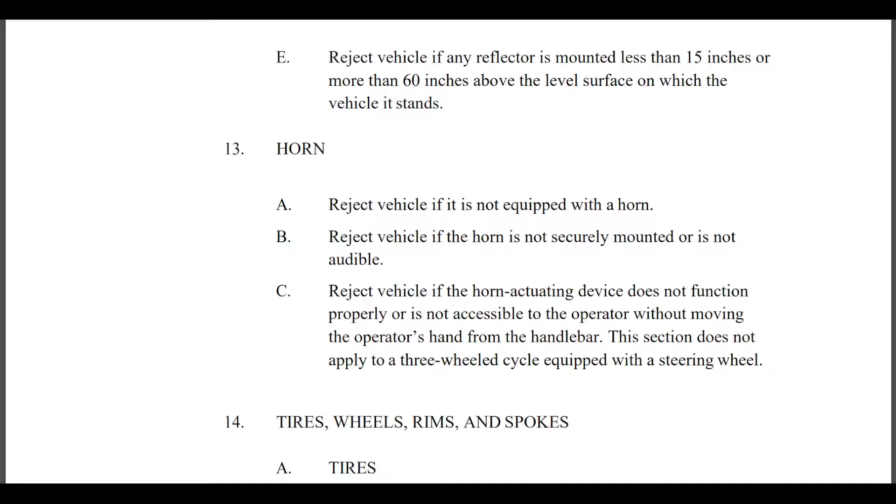14. Tires, wheels, rims, and spokes. A. Tires. 1. Reject vehicle if any tire is worn to less than 2/32 of an inch anywhere on the tread or worn to the wear indicators. 2. Reject vehicle if any part of the cord is exposed. 3. Reject vehicle if there are any bumps, bulges, or knots. 4. Reject vehicle if there is any tread separation.

5. Reject vehicle if any tire has been re-grooved or recut. 6. Reject vehicle if any tire has tread cuts or snags in excess of 1 inch or a cut deep enough to expose the body cords.

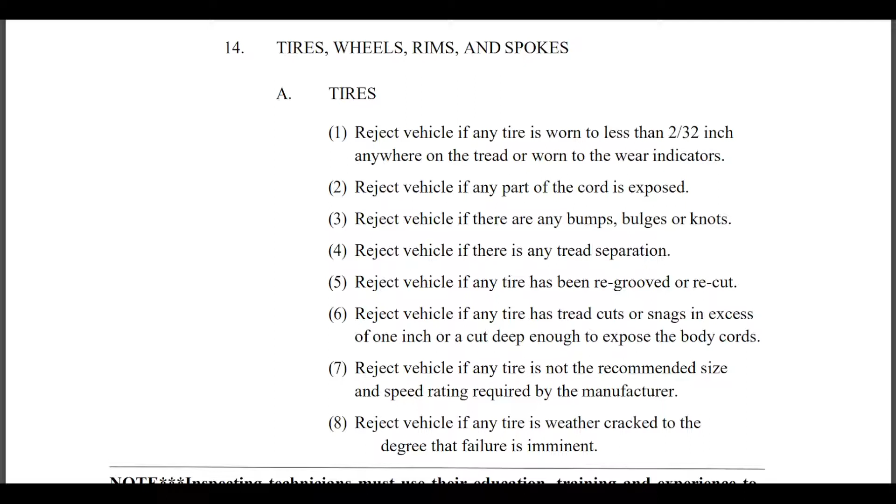7. Reject vehicle if any tire is not the recommended size and speed rating required by the manufacturer. 8. Reject vehicle if any tire is weather-cracked to the degree that failure is imminent. Note: inspecting technicians must use their education, training, and experience to determine if a tire is weather-cracked to the degree that failure is imminent. The age of the tire, along with the degree of weather cracking, should be considered. Age of tire can be determined by the DOT date code on the sidewall of the tire.

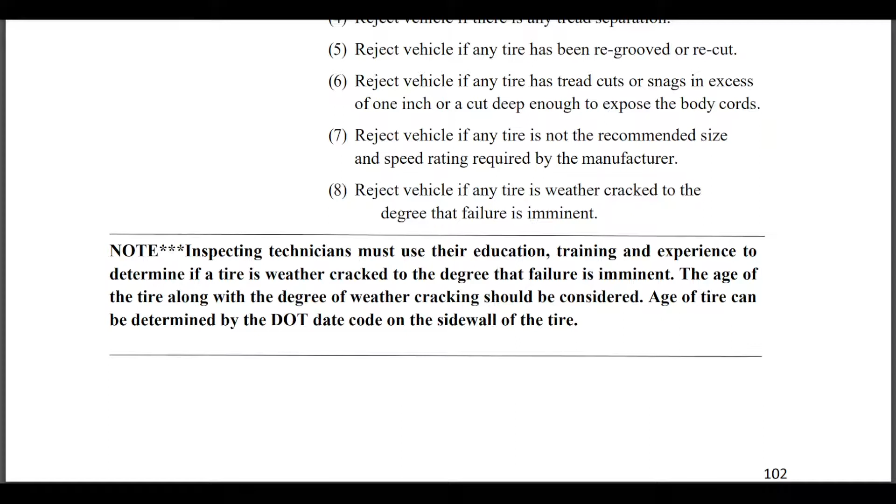B. Wheels, rims, and spokes. 1. Reject vehicle if any spokes or braces are broken or missing. 2. Reject vehicle if any spokes are visibly loose. 3. Reject vehicle if any part of the wheel rim is cracked or broken. 4. Reject vehicle if any brace, disc, strut, or spider is cracked or broken.

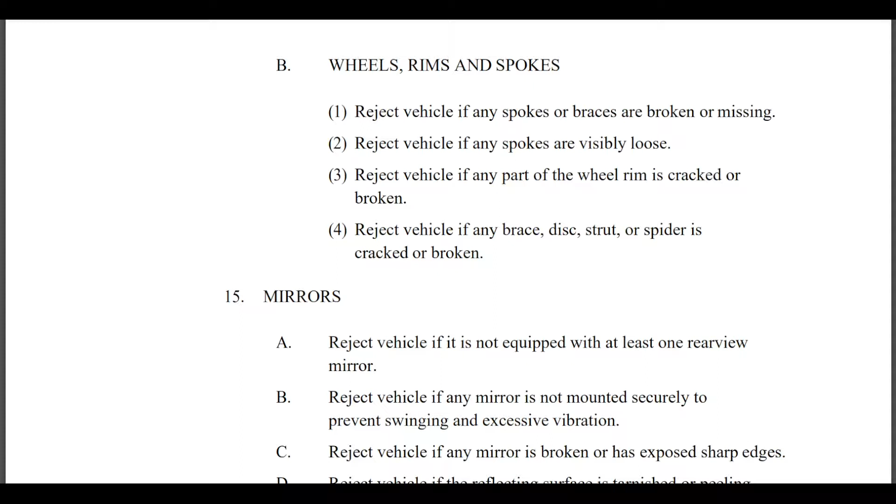15. Mirrors. A. Reject vehicle if it is not equipped with at least one rear view mirror. B. Reject vehicle if any mirror is not mounted securely to prevent swinging and excessive vibration. C. Reject vehicle if any mirror is broken or has sharp, exposed edges. D. Reject vehicle if the reflecting surface is tarnished or peeling to the degree at which visibility is reduced.

E. Reject vehicle if a mirror does not have a minimum of 10 square inches of reflective surface for convex construction or 12.5 square inches of reflective surface for unit magnification construction. F. Reject vehicle if any mirror cannot be adjusted or cannot maintain adjustment. G. Reject vehicle if the mirror location does not provide the operator with an unobstructed view 200 feet to the rear.

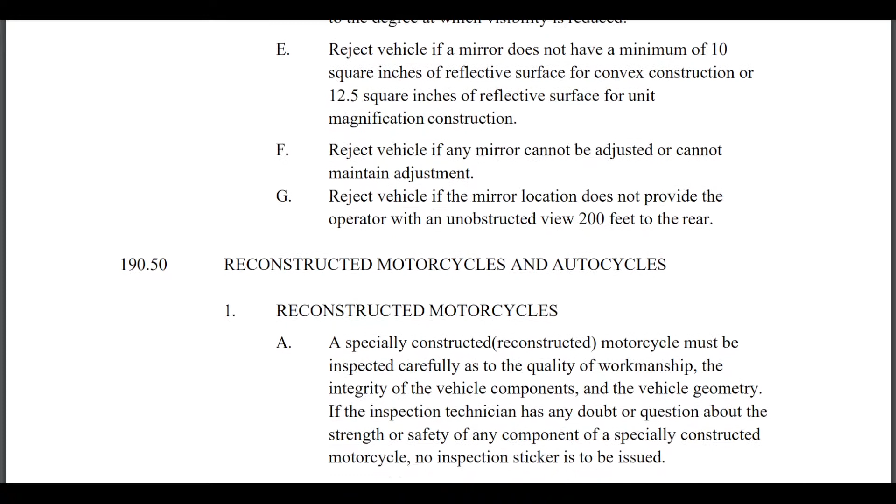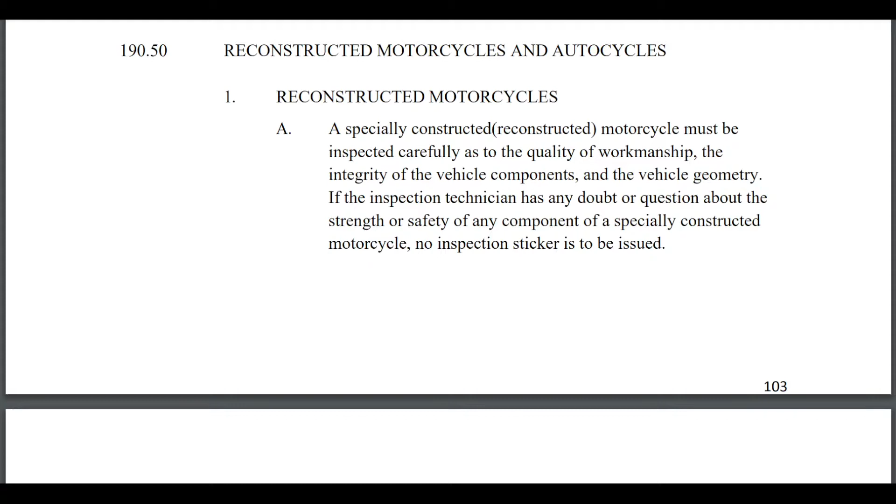Reconstructed motorcycles and autocycles. 1. Reconstructed motorcycles. A. A specially constructed or reconstructed motorcycle must be inspected carefully as to the quality of workmanship, the integrity of the vehicle components, and vehicle geometry. If the inspection technician has any doubt or question about the strength or safety of any component of a specially constructed motorcycle, no inspection sticker is to be issued.

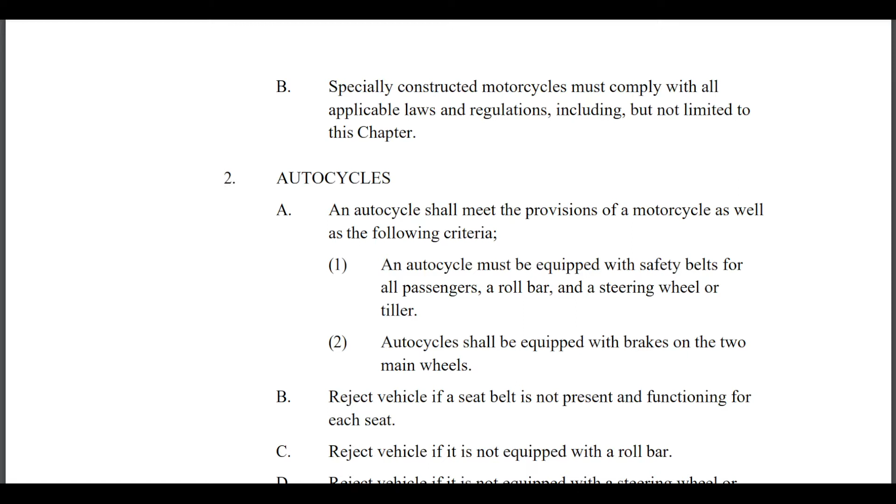B. Specially constructed motorcycles must comply with all applicable laws and regulations, including, but not limited to, this chapter. 2. Autocycles. A. An autocycle shall meet the provisions of a motorcycle as well as the following criteria. 1. An autocycle must be equipped with safety belts for all passengers, a roll bar, and a steering wheel or tiller. 2. Autocycles shall be equipped with brakes on 2 main wheels.

B. Reject vehicle if a seat belt is not present and functioning for each seat. C. Reject vehicle if it is not equipped with a roll bar. D. Reject vehicle if it is not equipped with a steering wheel or tiller.

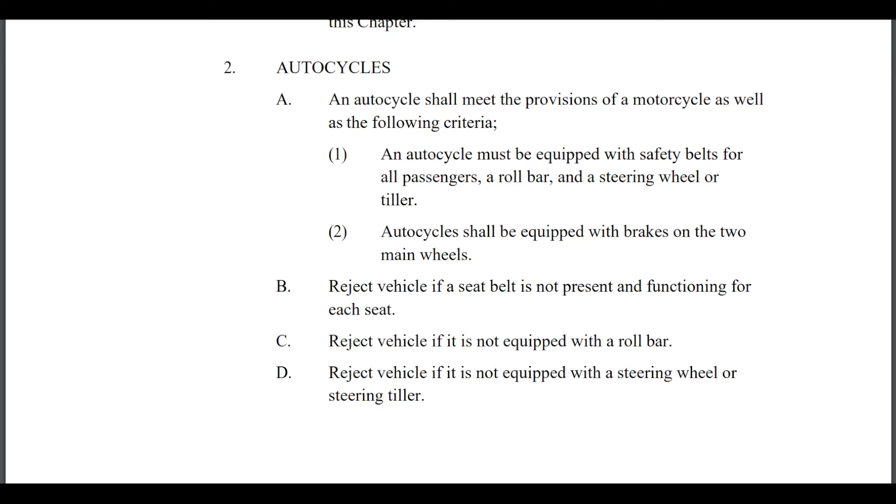Thank you for listening. This concludes Section 190, Class C Motorcycle Inspection.